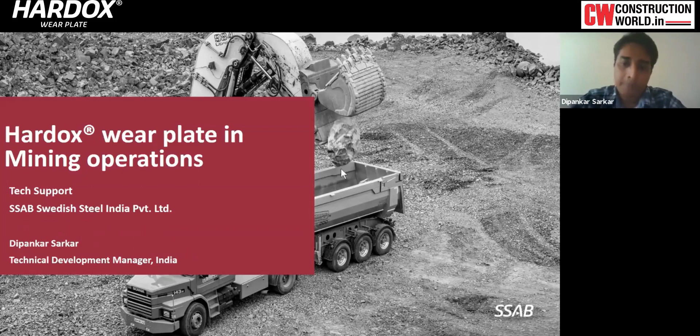Topics for today: I'll introduce you to our SSAB company in brief, and then we'll go through the upgrade benefits, how we can upgrade and how it's beneficial to the customer and to the environment, and the type of wear happening in mining applications. Some introduction of our trademark product, Hardox wear plates, and overall application areas for Hardox. Then we'll go to different materials and minerals in the mining operations we currently have, and the application areas and different parts and products with live case studies, which will be very much interesting for you guys.

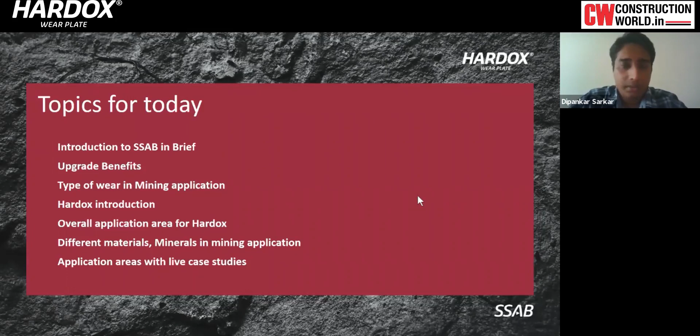So, SSAB in brief. In global steel making presence, we are manufacturers of steel wear plates since 1878. We manufacture the steel, and we have a very predominant global presence, with 14,000 professionals in 50 countries around the globe, supporting our customers with technical know-how and sales coverage. We have three steel divisions: SSAB Special Steels, SSAB Europe, and SSAB Americas, and two subsidiaries, Tibnor and Ruukki Construction.

In spite of having a pandemic year last year due to Corona, we have managed to get annual net sales of 65 billion Swedish krona, and we have the capacity of annual steel production of 8.8 million tons, which is quite huge in terms of world's largest producers.

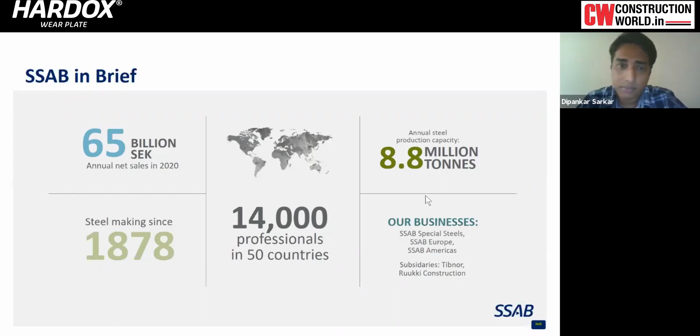We have 5 production units in Europe, 3 in Sweden, 2 in Finland, and we also have 2 production units in USA, in Iowa and Alabama. We also make tubes and box sections in the Nordics, and we have more than 150 countries of sales coverage with technical support and sales support.

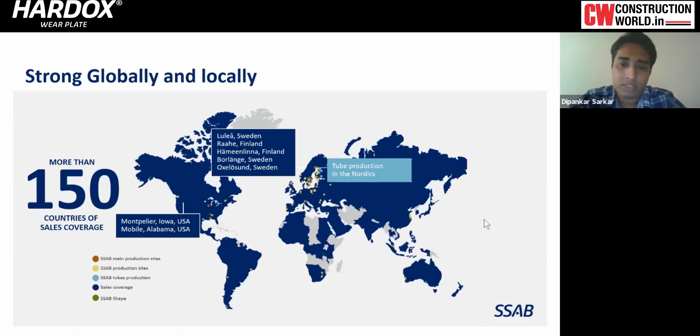So, what is our vision? SSAB's vision is to make a stronger, lighter, and more sustainable world.

To realize this vision, we are focusing on giving solutions of lighter and more strength materials, which have more durability, more service life, and which also affect production cost, reducing it. Weight reduction leads to less fuel consumption, and reduced fuel consumption also reduces carbon dioxide emissions. So upgradation to abrasion resistant high strength steel also benefits the environment.

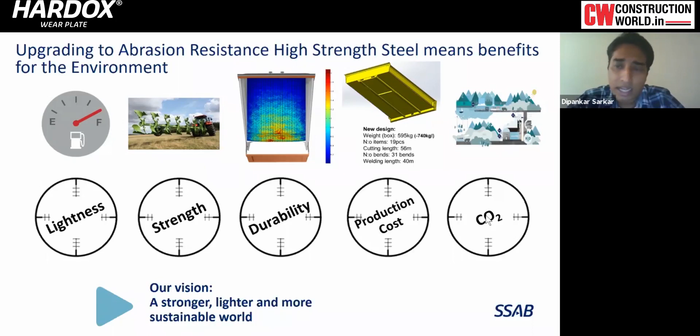So we are proposing this value proposition to the customer, and it also benefits the environment. I'll be talking mostly about wear patterns, and in mining operations we can see abrasion wear.

Abrasion wear is mainly subdivided into sliding and impact wear. And impact wear is again subdivided into particle erosion wear and abrasive impact wear.

So what is sliding wear? Sliding wear is when abrasive particles slide down on the wear plates, scratching and micro-cutting the wear plates, causing abrasion wear.

Impact is when you can see in the screen that abrasive particles are falling from a distance with some velocity and angle, directly falling onto the wear plates with sudden blows. The wear plate has to have very good impact toughness to resist cracks and to resist plastic deformation.

These are the impact wear applications we face every day in mining operations.

Particle erosion is when abrasive particles, fine or coarse, fall from different angles with some velocity. Abrasive impact involves bigger particles, where the predominant criteria is the size and dimension of the abrasive particles, which fall with velocity and at some angle.

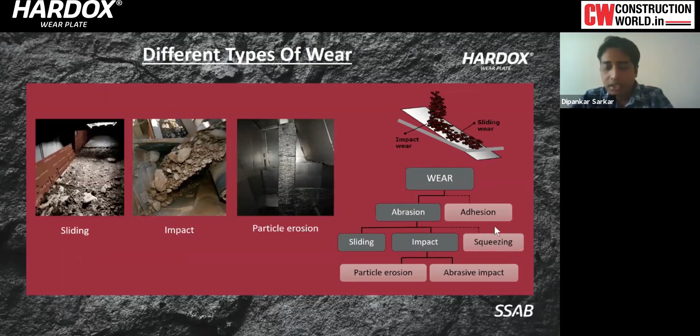We'll be talking more about this in the coming presentations.

So what is Hardox? Hardox is our brand for wear solutions in the highest possible, toughest and most aggressive, most challenging environments, with the best combination of high hardness and excellent toughness.

We have a hardness range for our Hardox wear plates from 350 BHN to 700 BHN, but currently in India we only supply 400 BHN material. We have thickness ranging from 0.7 mm to 160 mm and width up to 3.3 meters.

The main properties that differentiate our Hardox wear plate are high hardness through thickness, toughness properties, and properties that are mostly isotropic, meaning similar in all directions throughout the wear plate. It also has the best workshop properties like cutting, bending, and welding.

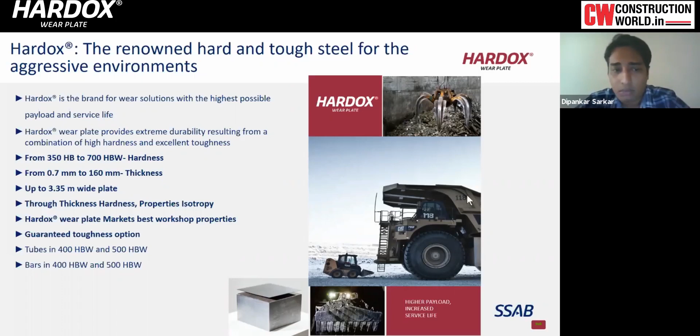We have some products with guaranteed toughness options, and we also make tubes and round bars of 400 BHN to 500 BHN.

These are the basic application areas, challenging areas for Hardox grade, where we have an opportunity to upgrade: tippers, trailers, construction and yellow goods segments, cement industry, concrete industries, waste and recycling including metal or plastic recycling industries, agricultural, forestry, and sugarcane mill processing industries.

But we'll be more focused in this webinar on mining, quarry, and mineral processing industries, where we can use our Hardox plates and where we have the opportunity to upgrade.

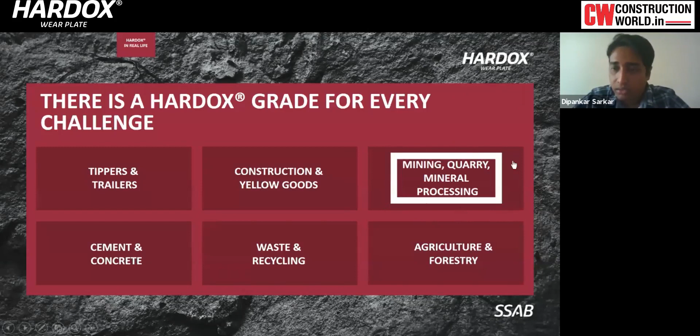We'll be having live case studies and upgradation case studies afterwards.

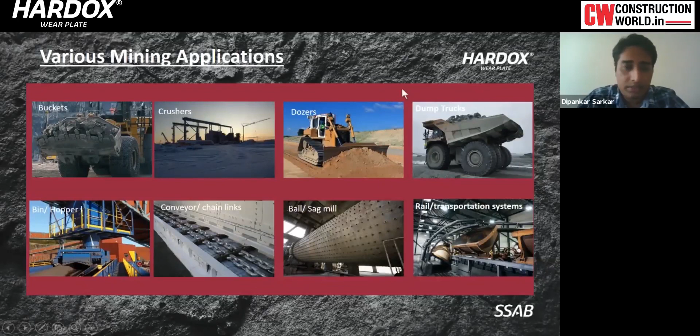So in terms of wear material applications in the mining operations, we are having various kinds of wear materials we are currently using, like ceramics. The ceramic material is very hard and brittle. It doesn't have the impact toughness to resist cracks or withstand plastic deformation.

So if you are using it in applications where impact or erosion wear is happening, this will not work. It will only work in the sliding area, but mostly in mining operations there will be impact, and a combination of impact wear and sliding wear. So this will only support sliding wear applications.

Again, hard particles in a soft matrix, that is the CCO plates, chromium carbide overlay plates. The base material is mild steel, and over that there is a chromium carbide overlay of a few millimeters, which supports sliding and erosion wear, but it also doesn't have the adequate impact toughness to withstand impacts during operations.

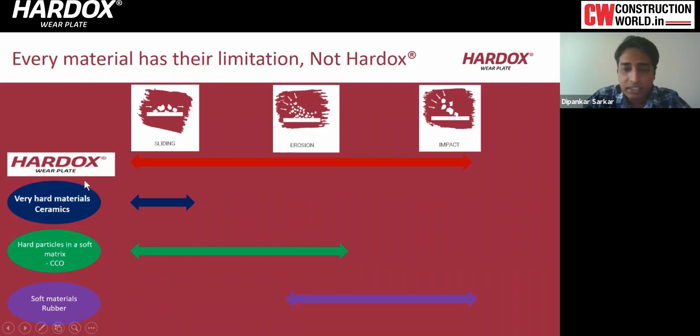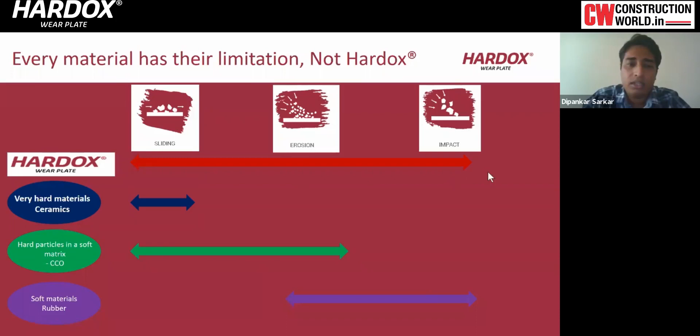Where we can see our Hardox wear plate with high hardness and impact toughness, where we can cover all operations and we have the opportunity to upgrade without limitations.

So understanding the abrasive material in the mining operation is very crucial and critical. We can see from the rock example here, in a rock or agglomerate in the ore area or mining area, that it consists of different minerals like hematite, magnetite, and quartz-rich minerals.

These minerals have their own hardness ranges. So in application, we have to know the distribution of minerals and abrasive particles, which have different levels of hardness, to suggest the suitable material and wear plates for your application, to get the best wear-out criteria and the best service life improvement.

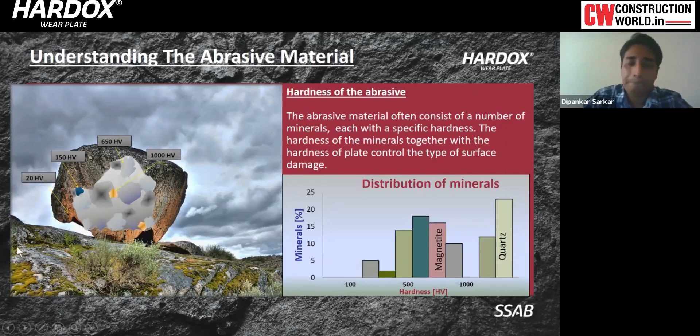So we need to know the hardness of the abrasive materials to give proper and suitable suggestions for your application, and it obviously varies differently in coal mines versus iron mines, and these are variable things we need to focus on while upgrading to a wear plate. So what is the requirement in the mining application?

As I told you, there will be applications in mining operations with a combination of both impact and sliding wear. So we need to focus on the pain areas and the failure properties in the application, whether it's a high level of wear.

High level of wear means the hardness of the abrasive particles will be dominant on the wear plates, causing micro cutting, as shown in the representation photograph on the left. This helps calculate the relative hardness so you can have a proper wear plate to suit that application.

In low level of wear, the particle normally deforms the surface of the plate through plastic deformation, which we call micro ploughing. To address this kind of application, we need to fix a wear plate which is very much suitable, where the deformation can be minimized.

Higher strength with higher hardness gives you the opportunity to increase the load carrying capacity, and with the proper solution, we can also reduce the structure you are currently having, making it lighter. And since hardness and strength are increased, there will be an increase in wear resistance and dent resistance.

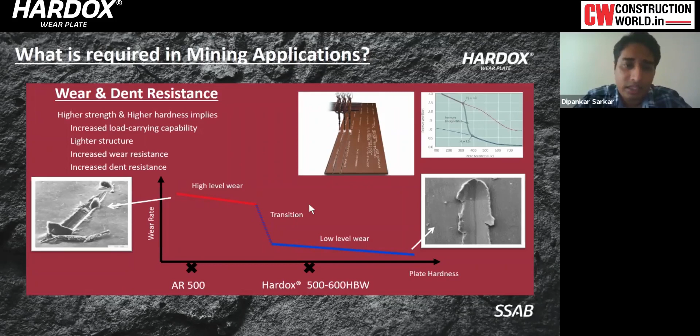So how do we configure the liner plates in mining operations? To understand the worn-down criteria for a particular application, suppose it's a liner plate configuration like this, and these are the abrasive particles which will be falling from a distance to the mid floor of these liner plates.

So the ductile zone, the impact zone, will be the mid floor section. The liner plates have to have proper impact toughness to withstand this impact, the heavy blows from the abrasive particles, and then it slides.

Then the particles slide down to the end, or are transferred to another place. So we need these liners to have a proper hardness range to withstand that sliding wear. In this way we try to configure liner plates with proper impact areas, and also areas which are only subjected to sliding wear.

In terms of this kind of configuration, we are trying to upgrade our Hardox 500 in the impact areas where we have the proper impact toughness, and we can go up to 550 and 600 BHN material to withstand the sliding wear. This is how we can configure the liner plates.

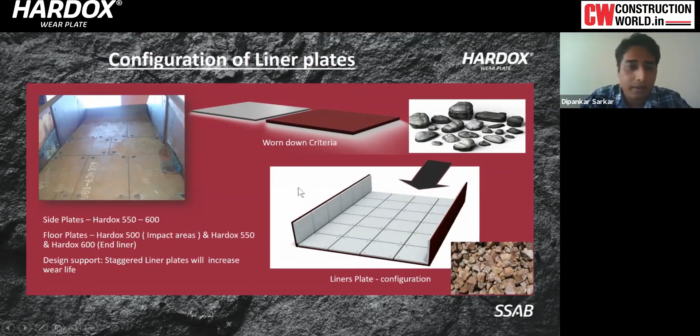This is the feeder chute liner plates. In terms of upgradation, you need to know the velocity and impact angle of the abrasive particles, and what type of mineral it is - whether high quartz or low quartz minerals - so that we can provide a proper solution to give you the best service life and reduce the current replacement cycles. If we increase the service life, the replacement cycles will be less, and the maintenance cost, repairing cost, and downtime lead time will be reduced.

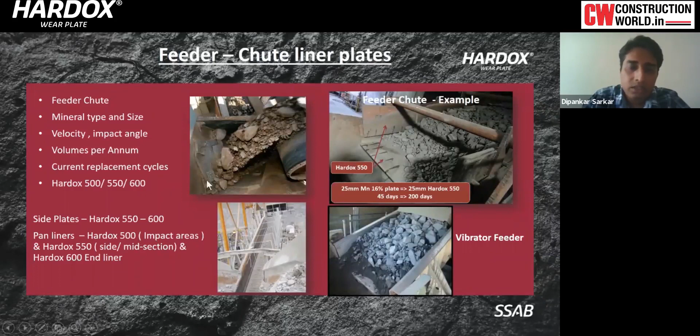Apron feeders are basically the transport medium of bigger fractions of particles, and conveyor liners are for the smaller fractions of particles. This particular part is called slats. In this conveyor liner or feeder liner, these slats are arranged in an array so that it makes a conveyor line.

These slats are subjected to impact in impact areas, because the particles will fall from a certain distance onto them, so the material needs toughness. We have supplied so many areas with our Hardox 450 for these slats, and we have conveyor liners which we can also upgrade to 500 BHN material.

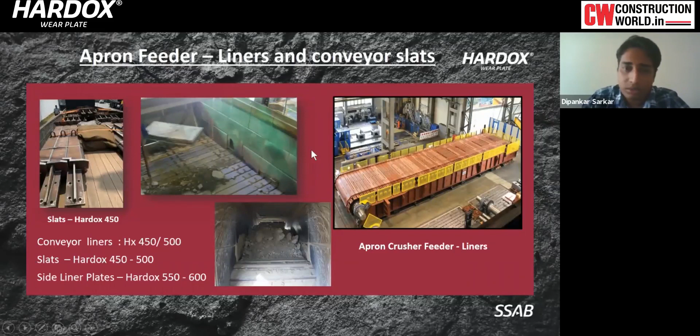The sideliner plates like this are only subjected to sliding wear because the particle will be moving from one side to another. So only sliding wear is here, and we can go up to 550 to 600. This is a very good and simple upgradation opportunity for our Hardox wear plates, which we can focus on and support you with.

This is the transfer chute liner plate. Transfer chute liners are like a joint of two conveyor belts, so the impact will be at the beginning as well as at the end, and sliding will be in between.

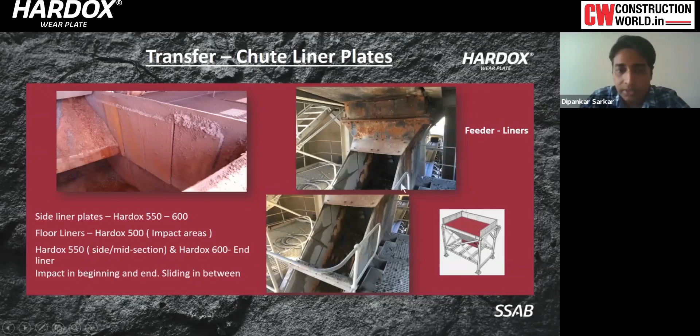In this transfer chute liner, we can design so that the high impact areas are covered with Hardox 500, and the side liners, the mid section, the side liner plates, and end liners can go up to higher BHN grades like Hardox 550 and 600 to withstand the sliding wear. We have many cases like this, so if anyone is interested, we can support with different types of liner arrangements and configurations. Of course it depends on the application area and the abrasive you're working with, so we can suggest the best suitable material for this kind of application.

So bin liner upgrades and hopper liner upgrades - there are various bin liners in different types of mining operations, with different capacities, volumes, sizes and dimensions. You have to consider the mineral type and size, as well as the velocity and impact angles in terms of this impact wear. We have a particular application live case study for these chute liners.

The customer had made this liner for chutes with S355 grade, and the service life was only 4 to 6 months. They came to SSAB for a solution for increased service life. So we checked the liner plate design and configuration, and according to the mineral type, size, velocity and impact angle, we suggested an upgrade to Hardox 500 in 15 and 20 mm thickness.

The customer estimated the lifetime increased to 24 months. That is very much helpful and beneficial for the customer, as downtime cost, repairment cost, and maintenance cost for the total chutes were reduced, and they are very happy with the solution. We can also support you with designs and suitable materials for this kind of upgrade with our Hardox wear plate.

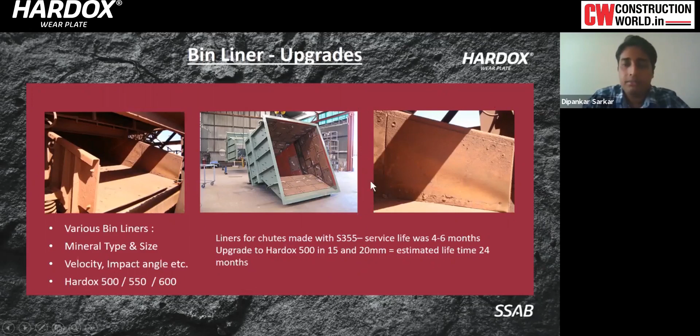Jaw crusher feed chute liners. This is the dead box concept which we have in mining operations. These scalps act as an obstacle for the bigger particles while falling from this height. The liner plates are very much subjected to impact, so with this concept we reduce the impact from the bigger particles. The material stops here and won't fall directly to the crusher, so it doesn't get damaged. This is like a dead box, and after that it falls off respectively, and then it will crush through the jaw crusher.

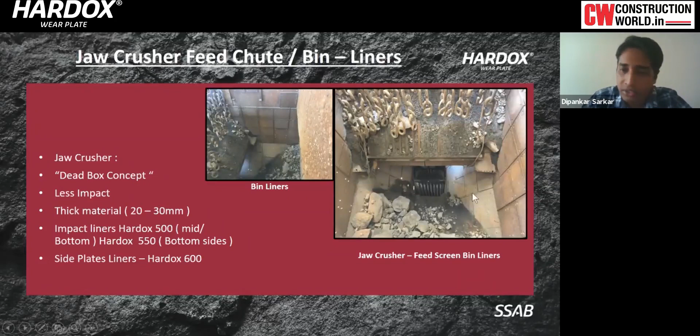So we can use thicker material for these liners, 20 or 30 mm, to withstand this much of heavy rocks and minerals, and this will also increase the service life of these impact liners. We can upgrade the side liners with 550 and 600 BHN materials, because they are only subjected to sliding wear. This is a very interesting application, the scalper screen liners.

This is basically a 4-finger liner of a vibratory feeder in a breakage system, which sorts the particles, and they fall through in impact intervals from high to medium depending on particle size and dimensions. It goes to the crusher, and the bigger particle stays, then again it vibrates from left to right and goes to the crushing line.

In these liners we have upgraded with thicker materials, from 25 to 40 mm, using our Hardox 500 and 550, depending on the type of abrasive they are using. This is a very good application where we can support you.

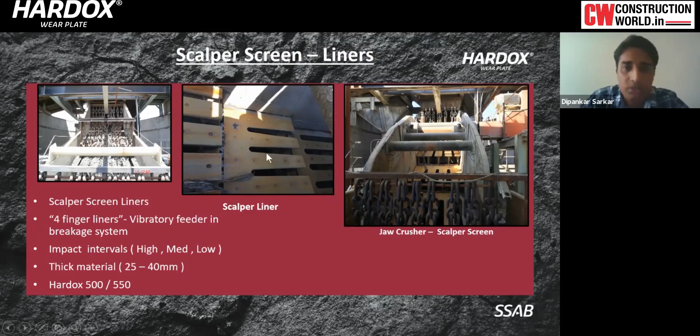Reclaimer bucket and wheel excavator buckets. In the reclaimer buckets, we can see it's basically scooping up the fine products and transferring them to the final export area. Only sliding wear is happening in the bucket, and it's evenly distributed, so here we can upgrade to our Hardox wear plates.

We have a live case study where our customer used, in the old version, S355 and 400 BHN material with hard facing, meaning chromium carbide overlay. With this combination they only had 5 months of service life. We took this project and gave a solution of making the whole bucket with Hardox 500, with the same thickness and design. The service life extended to 9 months, almost double the increment.

So this total bucket is made with Hardox 500. This is a very good opportunity to upgrade. You can see the applications, and you can anytime call us to discuss the opportunity for upgradation with our wear plates.

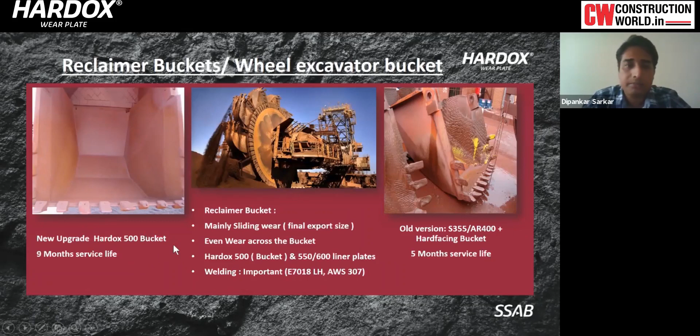This is also a very interesting application I have seen in the coal mines with the dragline bucket. I won't go into all of this now, so you can review it later. The main areas I will focus on are the floor plates, the side liners, and the cutting edge. We can upgrade these with our Hardox wear plates according to the need, the customer, and the application areas in mining.

And these drag chain links are also made with Hardox 450, because they are subjected to very much impact, so they need to have proper impact toughness.

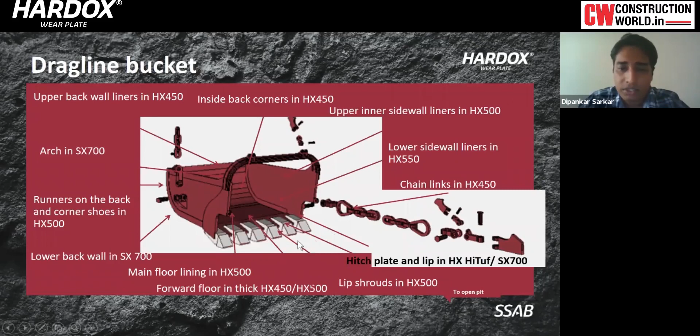So we can upgrade this chain links with Hardox 450, and this hitch plate, the lip plates, we can use normally it's the MN steel casting, manganese steel casting, but we can also upgrade this with our special products of Hardox HiTuf. So this is also an opportunity to upgrade these areas in the dragline buckets.

Loading system, this is basically a loading system where the final products are being loaded in the rail wagons. You can see, through this conveyor, the fine particles, fine raw materials are coming, and from this it goes to the surge bin, and through this surge bin it goes to the discharge chute hoppers, the discharge chute liners.

So in this total area, we can have the upgradation depending on the conditions of the final products, like whether it's dry or whether it's a wet kind of condition. Because normally in the fine products, while discharging from the conveyor, it makes very much dust, so to suppress this dust there are certain water nozzles which can suppress it.

And they have these sprayers over here, so this slurry kind of minerals, ores, are sliding down all the way to the wagon. So it's basically the sliding wear, but it may also have some corrosion as well. So we have very good products which can resist this corrosion plus wear pattern in this area, and it's a very good opportunity to have the upgrades with the Hardox plates in this area of loading system.

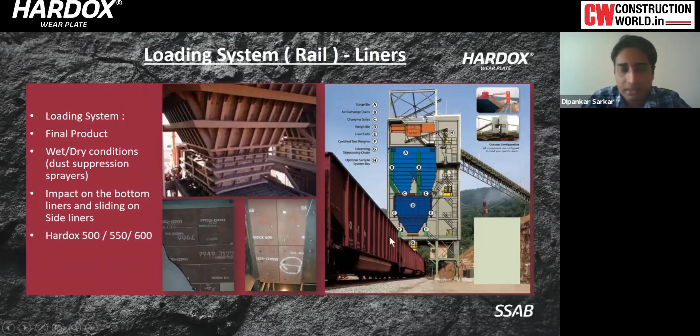Screens. So the screen plates are basically used for sorting, pre-sort, classify, and size split of the bulk materials to smaller fractions. We have done so many cases with making the screen plates. It can be roll formed, it can be bended, and it can also be made with a flat pattern.

And we have very good case studies where we have managed to extend the service life more than 30 to 40%, which is very much beneficial for the customer.

So the main thing which you need to keep in mind is the cutting process, because in this case the distance between the holes is very less. So if you are cutting this with plasma cutting or oxyfuel cutting, there will be a chance of a heat affected zone in these gaps. In the heat affected zones, you will not get the exact value of the plates.

So that is why it's very much crucial to minimize the heat affected zone as much as possible. We recommend water jet and laser cut to minimize this heat affected zone in the screen plates. We can also support you with the recommendation and the design, how you can optimize the design at your side, and we can also design for you. So these are very good opportunities to work with customers on these screens.

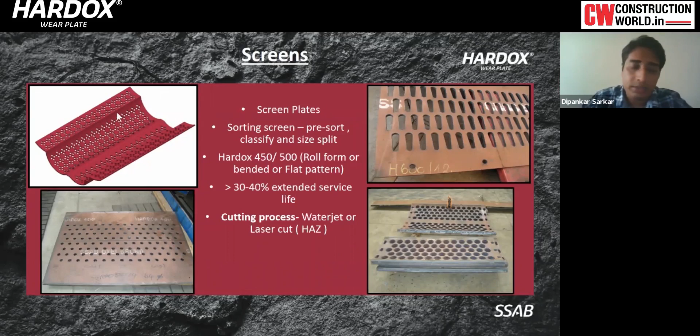So grizzly screen, grizzly bars, you might have seen, is the first entry point from the mines. It's basically the sorting screens, and it's the first entry point where the dump trucks are unloaded, and these particles will be preliminary sorted out.

So it's a very good opportunity to upgrade with special designs and modified designs according to your need, according to the nature of particles, according to the nature of operations you are having at your site.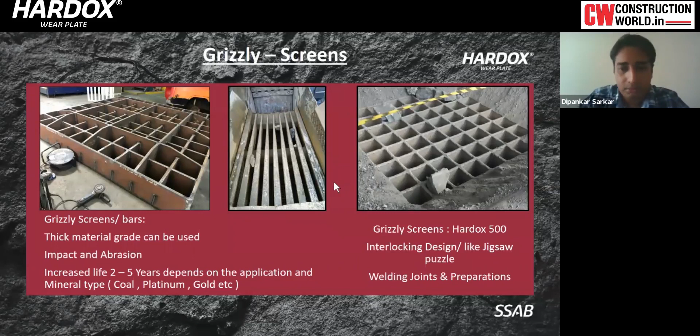Okay, so now we are coming to the excavator buckets upgradation. There is a product from SSAB, Hardox 500 Tuf. It's a very good product, and we don't have any competitor currently in this segment with this product. It's having very good toughness as well as hardness, as you can see.

We have very good case studies of upgrading with this Hardox wear plate in excavator buckets. Here you can see the excavator buckets. The customer was using a standard bucket, weighing around 21 tons, with a volume of 15 meter cube, and a load capacity of 39 tons, using S355 and 450 BHN material, not Hardox.

We upgraded with a combination of our Hardox 500 and 500 Tuf. The load capacity increased up to 18%, that is 43.6 tons, previously it was 39. The weight reduction is around 22%, from 21 tons to 16.4 tons. And the volume increased up to 18 meter cube, that is 3 meter cube of volume increased. So how does it benefit the customer?

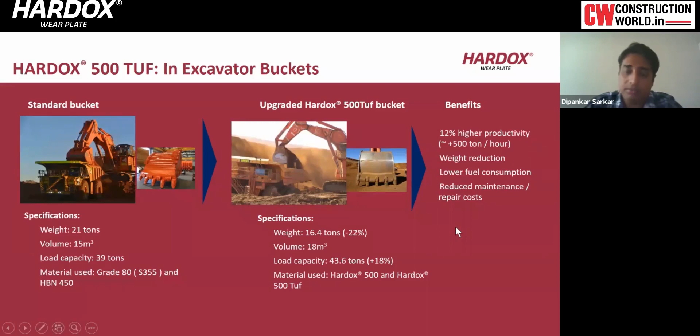The customer gets the benefit of higher productivity, around 500 tons of extra excavation per hour. The weight reduction results in reduced fuel consumption, and the service life is longer, so maintenance cost, downtime and repair cost are reduced. So it's a value proposition to the customer, who is benefited with this production. It's a very good opportunity we can look on.

Hardox 500 Tuf in dipper shovel and shovel buckets, you can see here. I'm sure you have seen many applications of shovel buckets in mining operations, used to load dumper trucks. We have many cases where we saved weight around 16%. The overall volume and loading capacity also increased up to 10%. The material used is a combination of 500 and 500 Tuf.

Previously, the wear package liners and parts made with S355 or 400 BHN material required more numbers of parts to withstand the challenging environment and have proper service life. But when we upgrade with Hardox 500 and 500 Tuf, the number of parts is reduced, so workshop productivity is automatically increased, and we save up to 25% of the time per loading cycle.

It's a huge thing in mining operations to save time per loading cycle, and it obviously increases productivity. With the reduction of weight, fuel consumption is also lower, so the environment also benefits since less carbon dioxide is emitted. Maintenance and repair costs are also reduced because of the longevity and durability of the product.

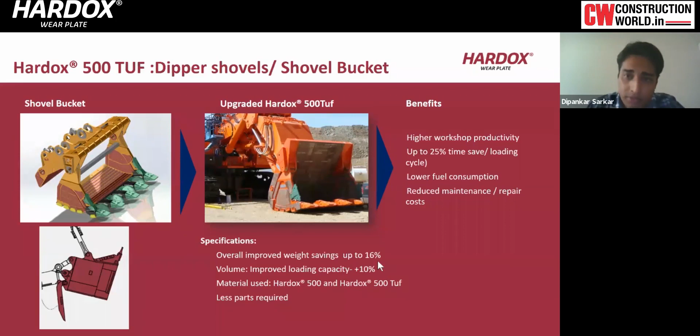Hardox 500 Tuf in dump truck liner kits is a very good example we have. Previously, depending on the capacity of the dumper truck, from 100 tons to 240 tons, the liner kits weighed from 5 tons to 15 tons. With the previous 400 BHN material, the customer had a service life of less than 8,000 hours, and at the rear tip end and dovetail areas, more liners were needed for proper service life.

There was also some carryback of material in the previous standard dump truck liner. Now we upgrade with a combination of Hardox 550, 500, and 500 Tuf in the liners, designing the configuration according to the impact zones and sliding zones. This way we achieve the best service life, and in our case studies we have increased service life up to 12,000 hours, which is quite significant in mining operations.

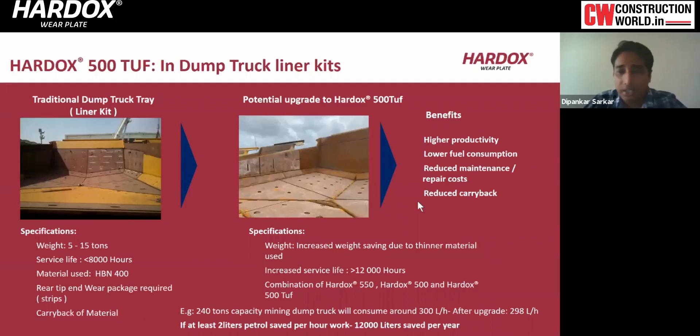So dumpers and the dead bed concept, it's a very good concept we have developed. We can see these are the wear plate strips, in the dovetail area at the rear tip end of the dumper trucks. What happens is, these wear strips allow finer abrasive particles to pack in between the gaps, forming a natural liner, so that bigger particles only roll on top of this packed abrasive material. So it will not harm the liners directly, and it will increase the total service life of these liners.

So it acts as a natural liner, and these designs are custom made and tailor-made according to your need, the nature of work, the abrasive, and the applications. We have done some combinations of liners like Hardox 450 and 500 Tuf with wear bars of 550, which actually reduces the overall weight of the dump truck liners by around 5 tons, increases payload capacity, increases fuel saving, and also benefits the wear of tires in mining operations.

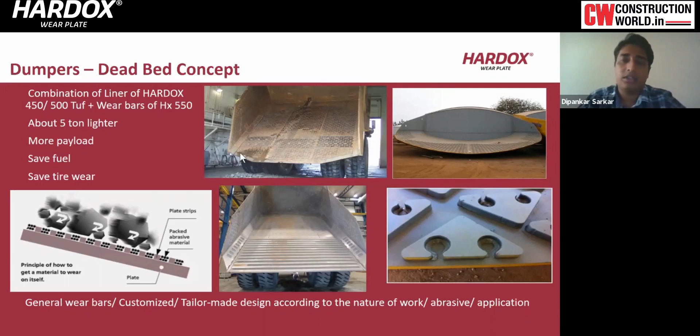So it's a very good concept, and we are very much open to work with you. If you need some design support or configuration of these liner plates according to your needs, we are very much open to that.

So we are coming to the end of the PPT, end of the webinar. From SSAB, we have developed some applications which you can find in your app areas, like in the Google Play Store and App Store. You can download it for free and use it. So I'll talk very briefly regarding these 4 applications which we have in mind, working very efficiently.

The WearCalc will give you the relative hardness, and according to your inputs, the abrasive particles, it will show you how much service life you can increase, and with a particular thickness you can have an idea, and of course you can discuss with us. This comes as a handy app whenever you can click into the mobile and check.

So this is a very good app where you can see. The WeldCalc app will give you a proper definition of the heat inputs and how much preheating time and temperature it will need, and what type, so you can optimize the heat inputs by ampere and voltage modifications. You can have this in the WeldCalc.

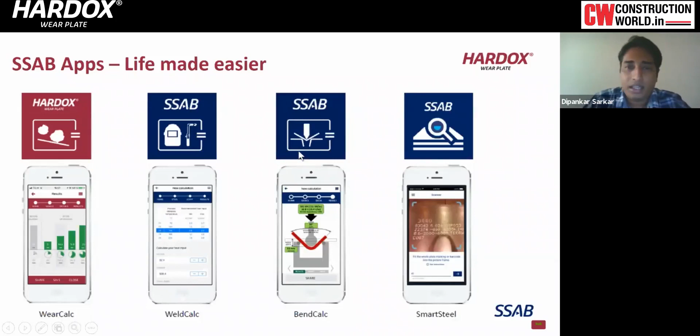So it's a very good app, you can check with yourself. These apps will make things at least a little easier in terms of application and workshop properties. So thank you for the webinar, thank you for listening to me, and we'll be going to the Q&A session.

For welding it's required because there may be a preheating temperature needed before welding, but in bending it doesn't require it - it's not a function of CET. You can now check with the BendCalc app for your particular query. Just put the thickness and the grades and you can have these values.

What is the life comparison between manganese steel liners and Hardox in crusher applications?

What about manganese steel liners? Hi Ricardo, are you there? So we have our colleague from South Africa. Ricardo, are you there? Yes, I am. Good afternoon.

Good afternoon. So we have a question regarding the life comparison between manganese steel liners and Hardox in crusher applications. Can you give some insight on that?

Yes, I can help on this question. It all depends on the application and the type of manganese casting that we will be dealing with. I would suggest, if possible, to have a bit more information pertaining to the application and the type of casting currently used. Based on this information, we can assess this and offer you a suitable Hardox for your application. We just need to assess this from our level, and then we can see what will be more suitable for you. Thank you, Ricardo.